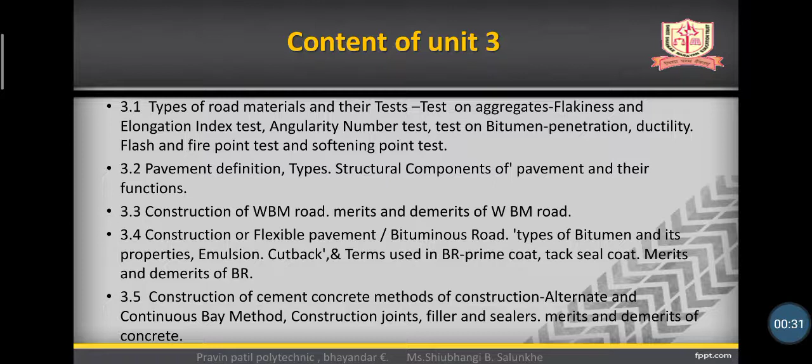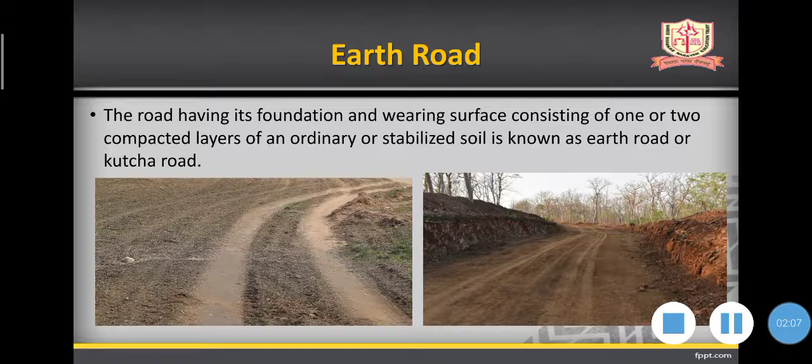So the earthen road is a compacted layer of soil. The soil can be ordinary soil or it can be stabilized soil. So whatever result we are getting, that is known as the earthen road, or a Kacha road.

Now we are going to see the construction steps of an earthen road. First we are going to see the material required for the earthen road. The materials required are natural soil, the soil available at the site, or a suitable stabilizer if required. So the material we require for construction of this type of road is usually whatever soil is present on the site.

So now we are going to study the construction procedure. The soil survey is carried out, the center line is fixed, and reference pegs are driven for the guidance of the vertical profile of the road. First, we survey the soil present on that site. Then we mark the center line, or the alignment on the site, with the help of the reference pegs. Then we mark the vertical as well as the horizontal profile of the road.

Then we see that the ground is cleared of shrubs, trees and other organic matter. If our ground is not clear, how are we going to mark our center line? So whatever the width of our road, throughout the length we should clear our ground. Then we should prepare the subgrade. For preparing the subgrade, we are going to roll it. For that we should have a roller, a plain roller, or it can be any type of roller.

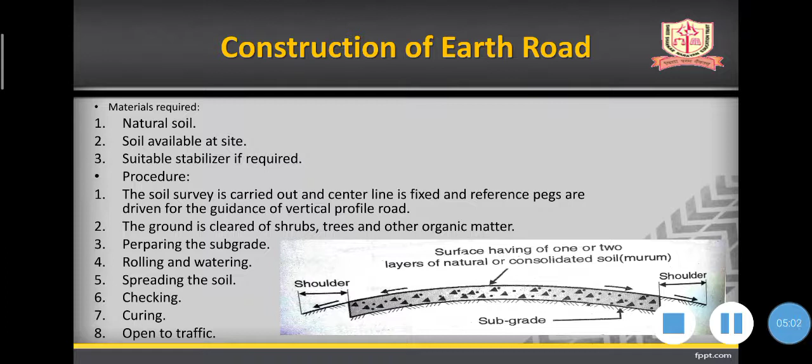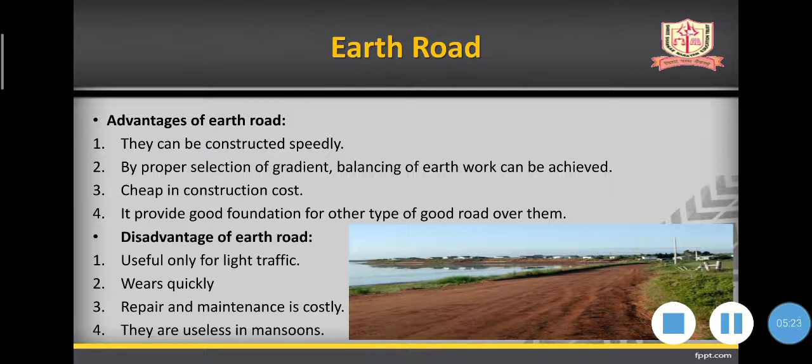Okay, then what are the advantages and disadvantages of our earthen road? The first advantage, they can be constructed very speedily. Why speedily? Because we don't require any material which we have to bring from any other site. Whatever material is available, we just have to compact it. The next advantage is by proper selection of the gradient, balance of the earthwork can be achieved. That means we have to select the proper soil, the size of the soil, the minerals required for compaction, so that we can get a balanced earthwork.

Then the third advantage is cheap construction cost, because we don't require any other material than soil and water, so it is very cheap. Fourth is to provide a good foundation for other types of good roads over them.

Then it can also form a very nice foundation for other types of road. For example, a bitumen road or a cement concrete road can be placed on the earthen road.

What is the disadvantage of the earthen road? Useful only for light traffic. Obviously, if heavy vehicles travel on this type of road, then our road may get compacted or change shape. So it is not suitable for heavy traffic.

Second one is wear quickly. Wear quickly means because it doesn't have a good adhesion power, the soil may get separated very quickly, and cracks, potholes and deformation or corrugation may be formed in this road.

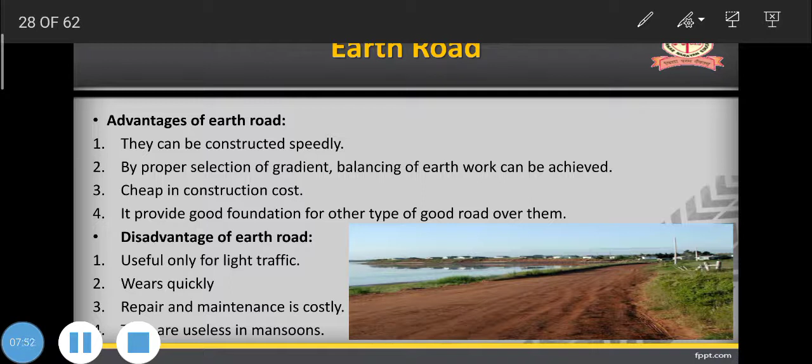They are useless in the monsoon. Obviously, in monsoon, the water is going to accumulate on this type of road. Because of that, the soil will grab that water and lose its strength, or lose its compaction. So that road can't be used in monsoon.

Ordinary earthen road. The earthen road having its foundation and wearing surface consisting of one or two compacted layers of natural soil available along its alignment. It means whatever soil is available on the site is compacted in one or two layers, and whatever road we are getting after compaction is known as ordinary earthen road.

What is stabilized earthen road? The earthen road having a foundation and wearing surface consisting of one or two compacted layers of stabilized soil. If the soil is stabilized with the help of a stabilizer, and the stabilized soil is compacted in one or two layers, then whatever road we are getting is known as stabilized earthen road.

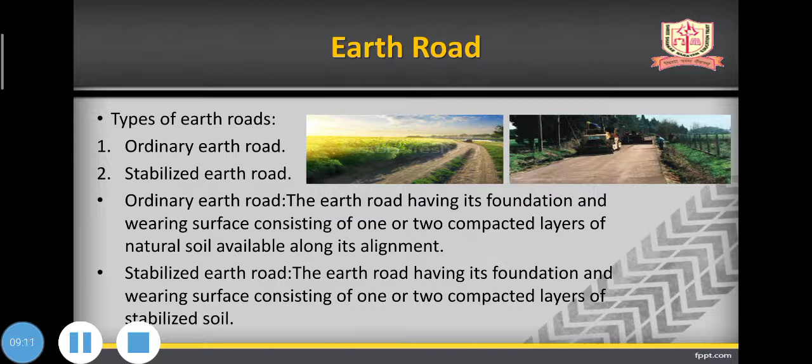We are going to see in detail the soil stabilized road. The engineering property of a poor soil can be improved by using admixtures, and this is known as soil stabilization. What is soil stabilization? If we improve our soil property by mixing any type of admixtures in the soil, that is known as soil stabilization.

What is the necessity, why do we stabilize our soil? To alter the property of the soil to suit the traffic requirement. Because if the traffic load is heavy, and there is only soil available as material for road construction, then the strength of our soil should be sufficient to bear the traffic load. Therefore, we alter the property of the soil to suit the traffic requirement.

Then, to increase the shear strength of the soil. If we want to increase our ordinary soil strength, we have to mix admixtures in our soil so that it can increase the shear strength of our soil.

To minimize the swelling due to wetting and shrinkage due to drying. What happens is our soil will get wet because of the water, and because it is wet our soil swells. If our soil is swelling, then it will lose its strength. So to minimize the swelling property of the soil, we use admixtures.

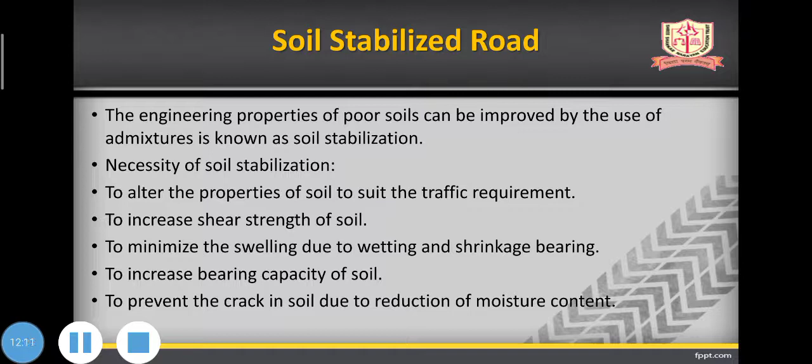Then, all the methods of soil stabilization. There are mechanical stabilization, bituminous stabilization, lime stabilization, cement stabilization, chemical stabilization, and miscellaneous methods of stabilization.

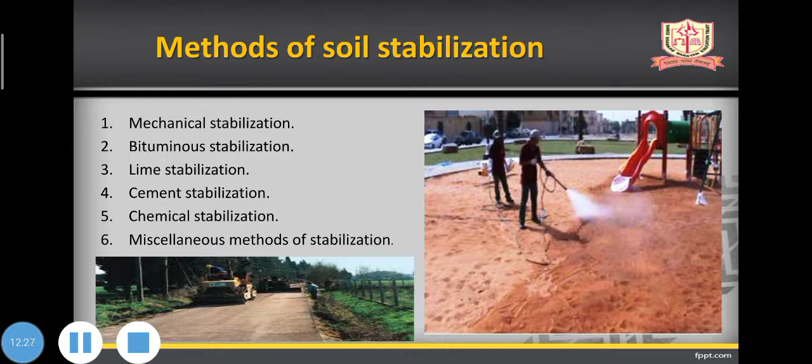What is mechanical stabilization? The first one is a sandy soil. If on a site there is a sandy soil, how are we going to stabilize it? So these are the steps to stabilize it. When the subgrade is sandy, the existing road surface is cleared. It is shaped to a required section. The top layer of the sand, of about 50 mm to 100 mm depth, is removed.

In the first step, we have to remove the top layer of the sand of about 50 to 100 mm. Then whatever shape we require, we have to provide that shape to the subgrade. Then in the second step, a layer of selected clay is spread upon the surface, and it is again covered by the sand which was previously removed. Then we get whatever shape we required for the subgrade.

After that we have to spread a layer of the clay. After spreading the layer of the clay, we again have to spread the sand which we removed previously. After that the two materials are mixed, and the mixing is carried out till uniformity of texture and moisture is achieved. After spreading the sandy soil over the clay soil, we have to mix it uniformly until we get a uniform mixture.

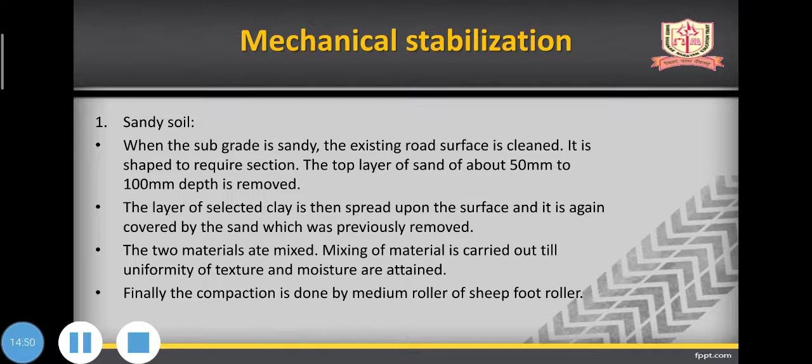The second case is for a clay soil, when on the site there is only a clay soil. What are we going to do? When the subgrade contains a large amount of clay, the road surface is cleared and it is shaped to a required section. The top 50 to 100 mm thickness of clay is loosened or disturbed so that it contains cracks extending to a depth of about 70 mm to 100 mm. Then the selected sand is spread and well mixed. The compaction is carried out by a sheep foot roller.

If on a site we see there is a clay soil, what are we going to do? First, we should provide the required shape to the subgrade soil. That means whatever slope we require for our subgrade, we have to provide that. After that, we have to loosen or disturb the surface of the clay by forming cracks in it, of a depth of 70 to 100 mm.

After forming the cracks, we have to fill those cracks with sandy soil. After that, we have to mix it. After mixing in a well-proportioned, uniform way, we have to compact it with the help of a sheep foot roller. Then whatever road we get, that is a stabilized soil.

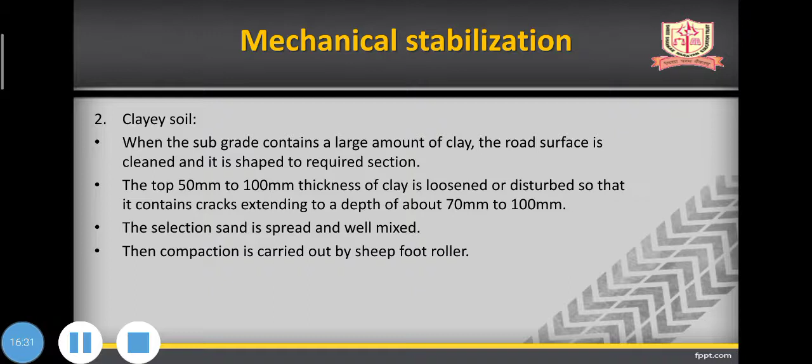Then if on a site neither sand nor clay is present to a sufficient extent, what are we going to do? When the subgrade doesn't contain sand or clay to a considerable extent, the materials are brought to site and well mixed in the required proportion. The mixture is spread on the road surface, then it is compacted by a sheep foot roller first and then by a medium roller. It is very simple.

If there is neither sand nor clay, what are we going to do? We bring the soil to the site. Then we have to mix it well. After mixing it well in proportion, the mixture is spread on the road, and after spreading, we have to compact it with a sheep foot roller and then with a medium roller. Whatever result we get after rolling, that is a stabilized road.

In all the above three cases, it should be seen that the final section of the road surface has a camber of about 1 in 24 to 1 in 36 to drain the surface water. In a stabilized soil, the camber we provide is 1 in 24 or 1 in 36, meaning the slope we provide for our carriageway is 1 in 24 to 1 in 36. Why? To drain the water.

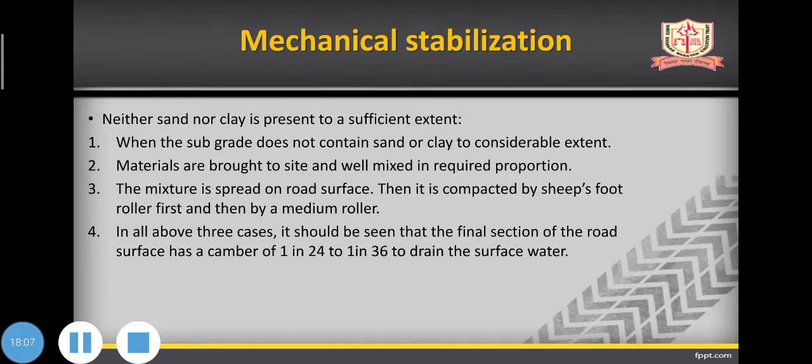Which factors affect mechanical stabilization? First, the gradation. Gradation means the type of soil, the material present in the soil, the minerals present in the soil. All these factors affect mechanical stabilization. Then the compaction. If our soil is not well compacted, that also affects mechanical stabilization. Then the soil properties, meaning the shrinkage limit and plastic limit. All these properties affect our mechanical stabilization.

Then the mechanical strength of the aggregate. Obviously, if aggregate is present in the soil, its strength also affects our stabilization. Then the mineral composition. If the mineral composition is not in proportion, it is also going to affect the stabilization of our road. So this is all about earthen roads and soil stabilization.